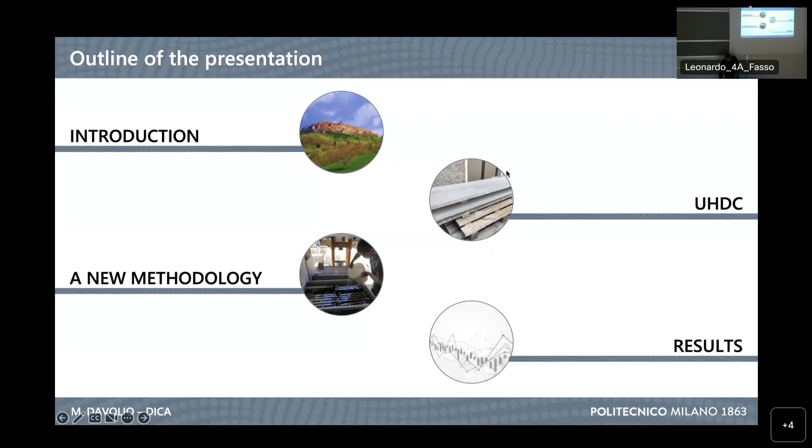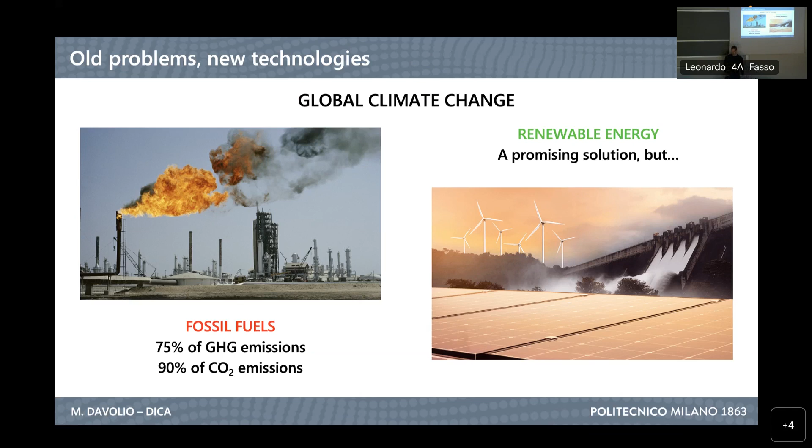As an introduction, I started from one of the most trending topics nowadays, which is global climate change, affecting global warming. One of the main issues related to this is fossil fuels, which highly contribute to the emission of CO2 into the atmosphere. One of the solutions we are developing more and more is the introduction of renewable energies, which are very promising from an energetical point of view. We know they have some drawbacks, but in general this is the direction we are heading.

There is a problem associated with renewable energy production: many plants have to face very harsh conditions during their service life. As engineers we know they are designed for a very long service life, and since they are very particular structures, they have high mechanical demand and also durability requirements, especially the ones exposed in harsh environments such as chlorides, sulfates, or others. We have some examples here, and for these applications we already know that ordinary reinforced concrete is not suitable due to its poor durability properties.

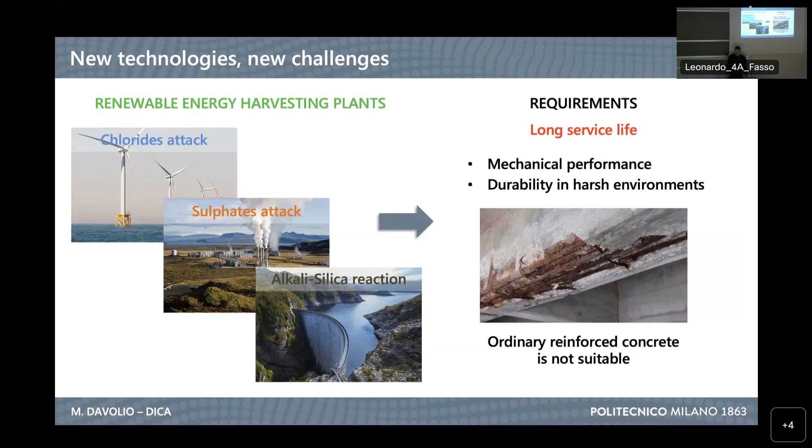For this reason, in the framework of a European project, we tried to develop a new material which counterbalances the lacks of performance related to ordinary concrete. The purpose of applying this material is to develop different designs for strategic structures in different conditions, such as onshore and offshore, which have different exposure and environmental conditions they have to face throughout their service life.

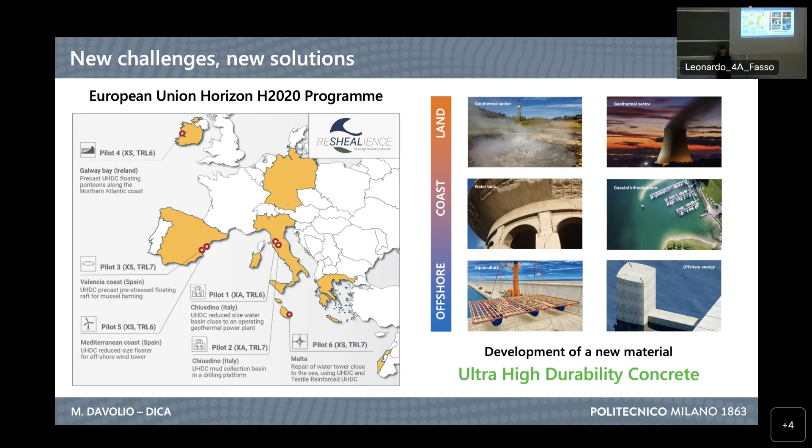As I introduced the concept of this new material, ultra-high durability concrete, I will now briefly describe its properties. Starting from the mix design, the things I want to point out are the significantly low water-to-binder ratio, which guarantees a high compressive strength, and also the delayed hydration, which characterizes this material due to the unhydrated cement particles inside the matrix after casting.

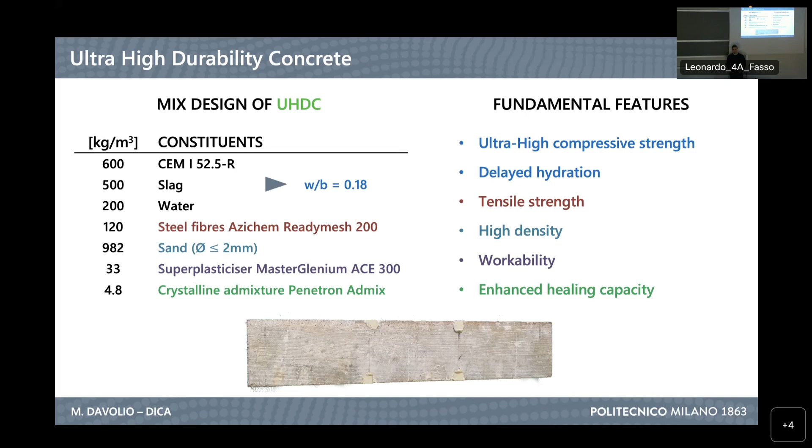Then we have 1.5% by volume of steel fibers, which can give this material a remarkable tensile strength. So we will see what are the results of this kind of mix design. Then we have some other components, and the one I want to highlight is this crystalline admixture, which was specifically developed to enhance the healing capacity of the material.

As I mentioned, one of the main features of UHDC is this mechanical performance, both in terms of compressive and tensile strength, which allows us to reshape our concept for structural design, reducing the sections of the elements, and in some cases, reducing or removing the reinforcement parts.

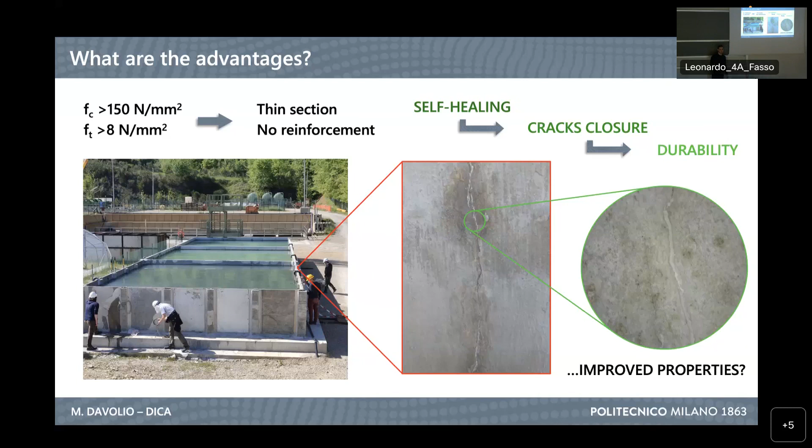And from the durability point of view, you can see here a real-life application, and the self-healing capacity of the material closes the cracks that happen in concrete, as we know, and thus fosters the durability of the structure itself, limiting the penetration of aggressive agents inside the matrix, and thus the corrosion of the reinforcement.

But all these features need to be implemented in our design process. And to do this, as we know, we need a constitutive behavior of the material. Specifically for UHDC, one of the most important things is its behavior over time, because as we mentioned, we developed this for durability.

Durability is a property we need to address over time. Currently, the most diffused standards use this prescriptive approach, where durability is addressed by some requirements we need to fulfill to complete our durability design. But for this material, this type of approach is not suitable because it does not have static, constant properties, but a kind of evolving response over time.

So the reason why we needed to develop this methodology and to carry on this work was to try to understand how these properties develop over time in terms of constitutive behavior and durability response.

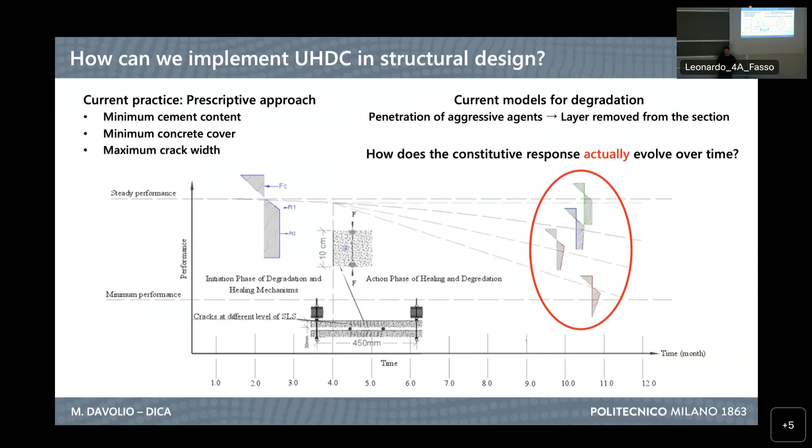So, as I said, we developed this methodology. Here I reported the main characteristics of the methodology we proposed, which was meant to represent as detailed as possible the conditions a structure has to face throughout its service life, namely a long-term exposure, which can be facing different types of environments.

I already mentioned chlorides and sulfates. These are two very common applications for offshore structures, for example, or geothermal plants, which you will see later. Then here we have flexural loading, and in general, a structure has to face any type of mechanical loading. We study the flexural loading, which has to be applied throughout all the investigated time.

And then these two parameters affecting the performance of the material are counterbalanced by the self-healing, which should be able to counteract the degradation of the material and provide constant or enhanced performance over time. Other characteristics of the methodology we will find out throughout its description are the repeatability, adaptability, and it involves many different parameters so that we can address different properties of the material.

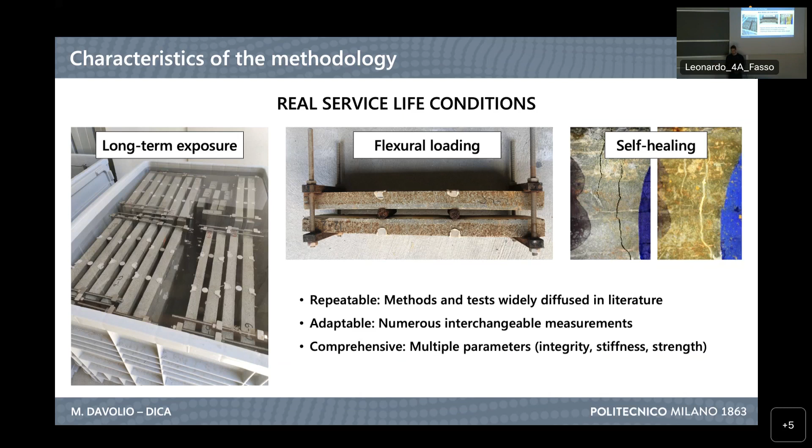And this methodology was not only proposed, but also developed on a case study where we addressed 3 different batches of UHDC, where the reference one had only the crystalline admixture in addition to the mixed design I already described for the autogenous healing.

While the other 2 batches, having also the crystalline admixture, also had, in one case, alumina nanofibers, and in the other case, cellulose nanocrystals. We will later find out the contribution of these nanocomponents to the performance of the material. On the other side, we investigated 3 different exposures.

The first one is tap water used just as a reference, but what we know is that our structure, for example in this case we have a geothermal plant, is exposed to sulfates, and this is a raft for mussel farming, exposed to chlorides inside seawater. So we studied these 2 exposures.

I want to mention that for geothermal water, we shipped the real water from a geothermal plant to the laboratory to have it for our exposure.

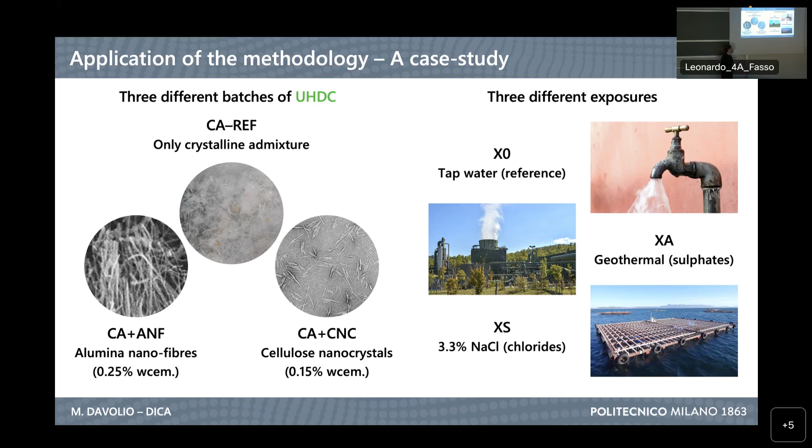And this is the layout of the methodology. I know it's a quite full slide, but we can separate it. On the left side, we see all the specimens we tested. For each material, we had 72 thin beams. We will see a picture of them later.

The idea was to expose all of them in the 3 different exposures and test them at different times. For the first 3 months, the testing was carried on with 9 couples globally, and then we took wider time spans of 3 months up to 6, 9, and 12 months, with a higher amount of specimens.

So this is what we tested, and what we did is summarize these experimental steps, which started on the site of the geothermal plant you saw in some pictures, with the casting of the slabs, which was also helpful to actually see the real condition of casting we face for precast structures on site.

For these slabs, a magnetic survey was performed, and then they were cut into the thin beams we used for our laboratory testing, which started from this first stage, where the specimens are uncracked, as they were produced, and we did two different non-destructive tests that we then repeated afterwards, as you can see from the picture, at stage 2 and 3.

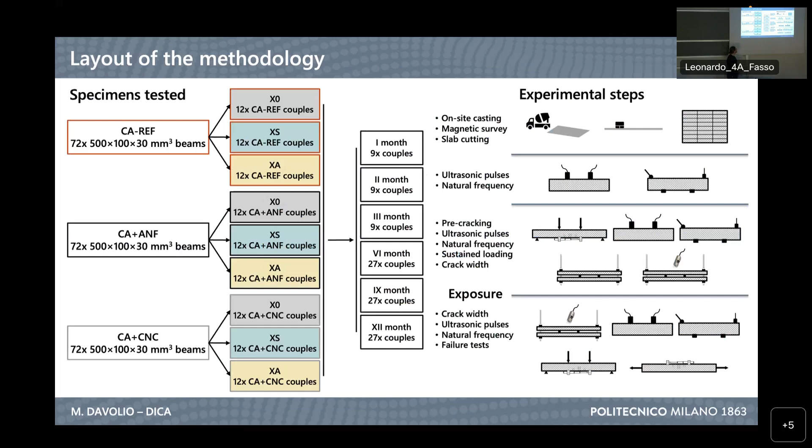So now we will go through the steps I briefly described. This is the magnetic survey, and the purpose of doing this was to try to determine the distribution of the fiber, because of course when we cast fiber reinforced concrete, we don't know the actual result of the casting, especially when we discuss on-site casting, which has some logistical issues.

For this purpose, we used this magnetic probe, which is able to measure the inductance of the material on a thin layer, which was perfectly suitable for our case, since we had nominally 30mm slabs.

From this, we could draw these contour maps. You can see an example here, to see if there was any significant variation of the fiber content inside any slab. What we observed is that the distribution of the fibers is quite constant on the surface. I want to point out, I'm talking about the surface and not about the section. We will see about this later.

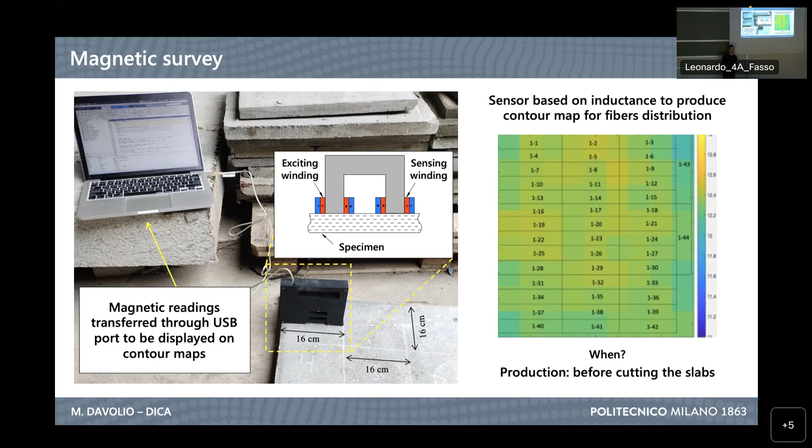For this reason, we can consider all the beams we cut from the slabs as nominally identical in terms of reinforcement, which is very important to address their mechanical performance.

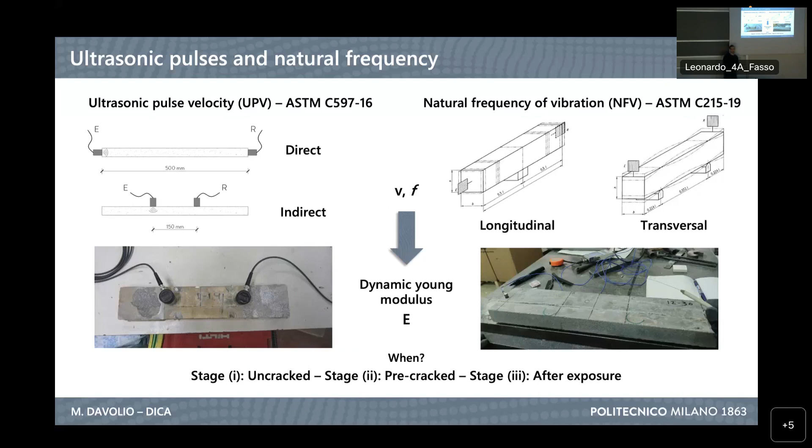These are the two non-destructive tests that we repeated 3 times: ultrasonic pulse velocity and the natural frequency of vibration. I will not spend much time describing these tests. We did each of them with two different layouts. The purpose is to obtain a dynamic elastic modulus, which represents the condition of the specimen at the investigated time. We could also relate each measurement with the previous ones to see how it evolved.

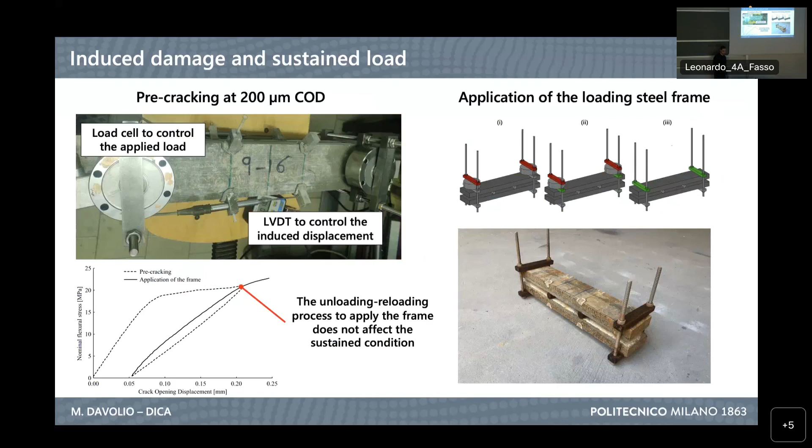So we verified that reloading it at a specific targeted crack width—better, at a specific load, which was the same we achieved during pre-cracking—obtained the same crack width we wanted to have. For this, we calibrated the system and we observed it was as we expected. So the condition we see here is the same as pre-cracking.

Then we measured the crack width of the specimen by means of a digital microscope. We did both a detailed scanning of just 2 cracks from each specimen, as you can see from the scheme, and in some cases we counted the number of cracks because we expect a multiple cracking regime from the UHPC.

This is the processing we did for the cracks. We could recompose the profile of the crack with the pictures we took from the microscope, and from that we binarized the crack to obtain the area. We tried 2 different methods.

The first method was manual, which was very time-consuming, and for this we moved to a more automatic method, which was this DeepCrack code, which allowed us to just give the raw image to the software and obtain the profile of the picture of the crack.

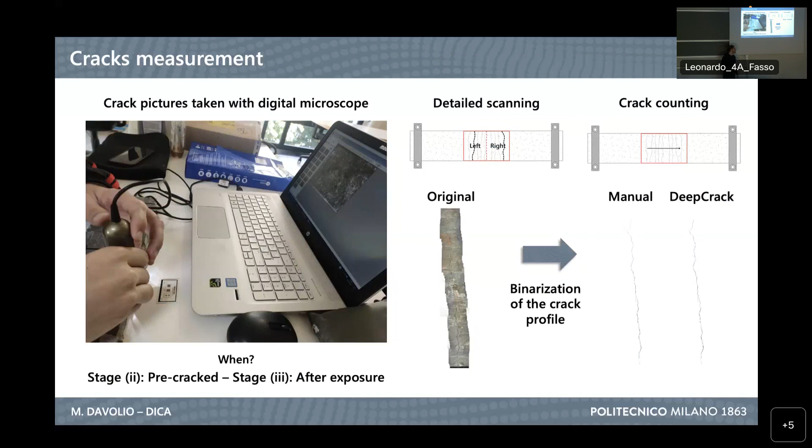We also calibrated this method, observing how much was the difference between the manual processing and the automatic processing. And the difference was below 5%, so we accepted the automatic one as reliable.

And the ones I already described are the non-destructive measurements. Then we move to the destructive parts. As I said, the specimens were pre-cracked and then, after exposure, were tested under failure.

For the ones that were tested under 4-point bending, we have this curve, which is the pre-cracking, and the subsequent curve, which is the failure.

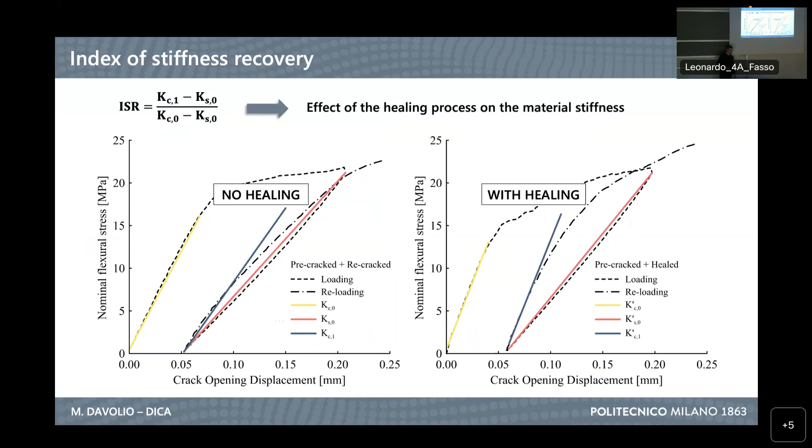And from this, we could calculate the index of stiffness recovery, which is defined here. As you can see, this is one case without healing, and the stiffness has no significant variation between the initial loading and the second loading, while when the initial loading is at the beginning and then we have healing, we have a slight or remarkable increase of the stiffness.

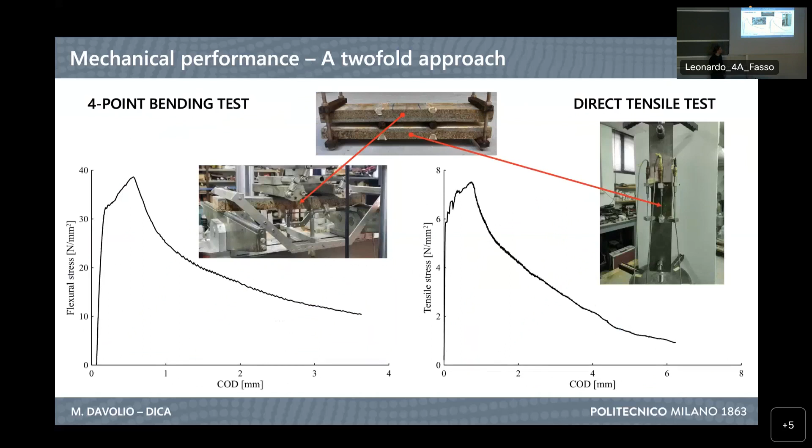For the failure test, we have a twofold approach. As I already mentioned, one of the 2 specimens from the couple was tested under 4-point bending, and the other one under direct tensile test.

The last step of the methodology was to develop a method to obtain a constitutive behavior, because this is what I mentioned as our goal for the work. The problem is that for flexural tests, we only have a structural response for the specimen.

And for this reason, we took a simplified inverse analysis method from literature, and we adapted it to our case with the purpose of obtaining from our 4-point bending test a constitutive response.

We derived these numerical correlations between the test and the constitutive law. And as you can see, we also controlled the calibration of the method, which was quite satisfying, and for this reason, we applied it.

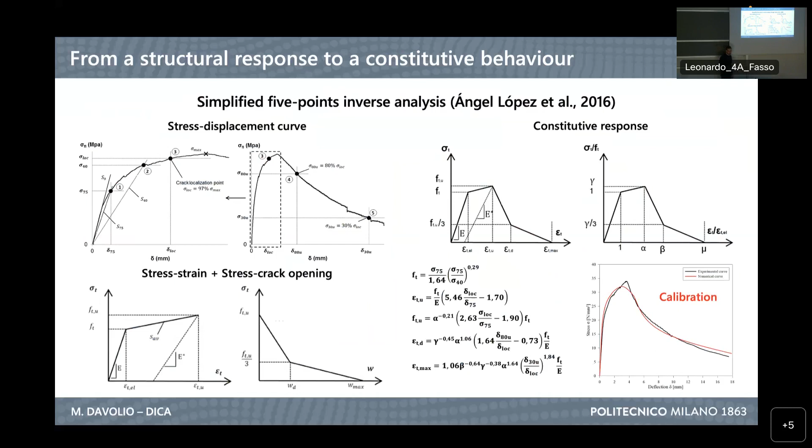Then I will briefly discuss the results of our methodology.

Starting from the self-healing capacity of our UHPC, which, as you can see, developed a multiple cracking regime with many cracks of a very small size, small width, and this fostered, of course, the self-healing capacity of the material, which is able to seal these small cracks, as you can see from the picture. Most of them are sealed.

And this is what we experienced here, when after 9 and 12 months, all the cracks were completely closed. And also, after very short periods, we already are between 85 and 95% of crack sealing.

And also, the cracks we formed at pre-cracking and that were sealed, they remained closed even during the failure test, which localized the failure on new cracks, meaning that the products developed during the sealing process were effective to bridge and to close the cracks, also resisting from a mechanical point of view.

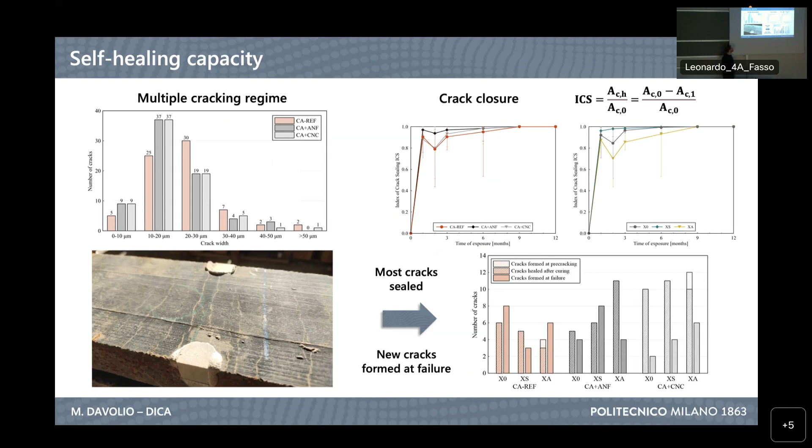The stiffness was addressed both from the dynamic modulus, or recovery of the dynamic modulus compared to the initial condition and the damage we applied to the specimen, and this confirmed what we observed from the crack sealing.

As you can see, in most cases, after 1 month, we are already close to 100% of recovery, and the performance stays still until 12 months, where we observed some slight reduction of the values.

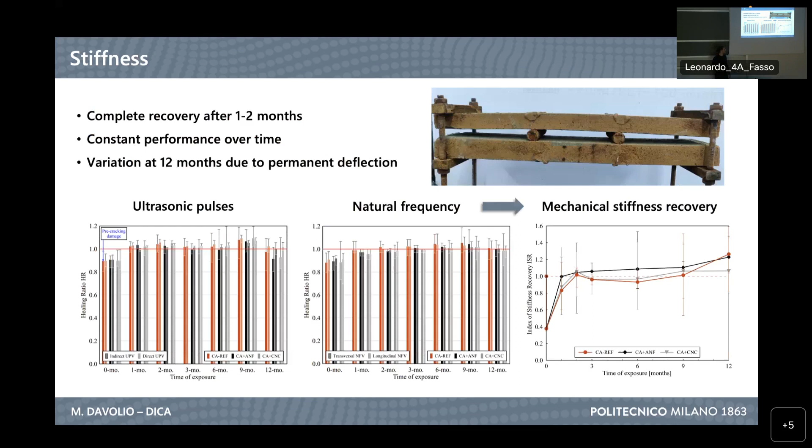And also, with the index of stiffness recovery, which is then a mechanical measure, we observed the recovery up to from 80 to 100%, even after 1 month. And it progressed constantly at 100% for all the periods.

From a mechanical point of view, we see some scattering of the results, which is even more significant than the evolution or any possible trend over time. This means that the specimens are not really affected by the condition they are facing, and on the contrary, they are effectively healing and keeping their constant performance over time. So this is another confirmation of what we were trying to observe.

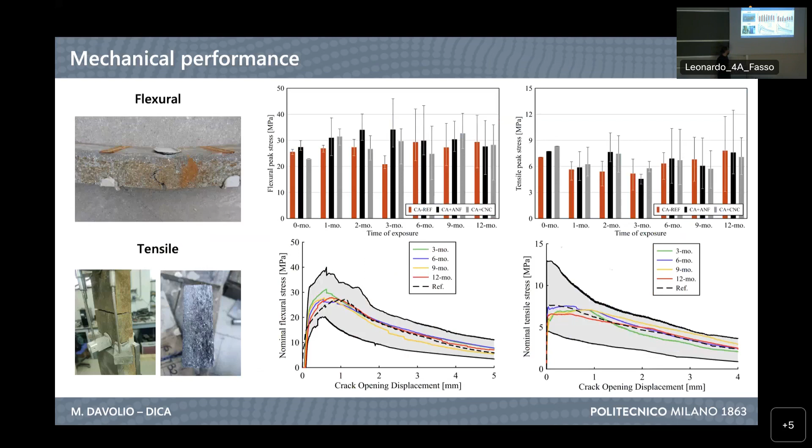As you can see from the average curves, from the flexural test and from the tensile test, they are pretty similar, and they are all close to each other and inside this envelope of the tests. And these are some pictures of the failure we observed. We will further discuss the tensile failure later.

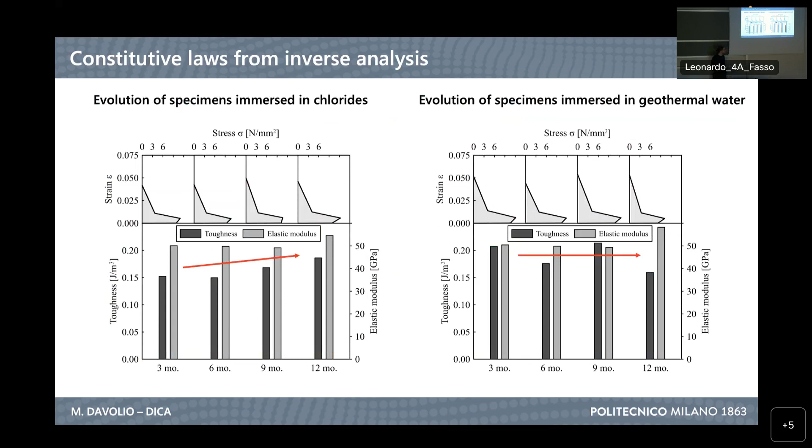These are the results from the last step I mentioned. I am just presenting two cases, the specimens immersed in chlorides and in geothermal water, because what we observed from crack sealing is that for the chlorides we had this phenomenon of remarkable sealing of the cracks at very short times, confirmed by the inverse analysis with this increase of the toughness of the material, while geothermal water performed almost constant over time with some scattering from the first period to the last one. And this is where we experience some reduction of the response of the material.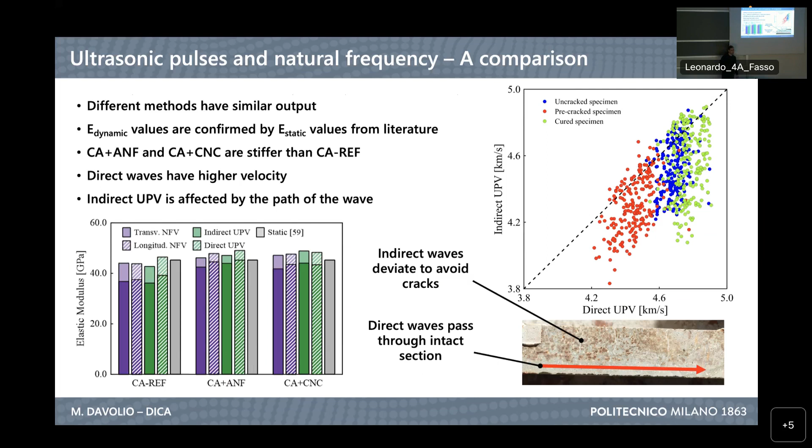We have some differences, especially between the two ultrasonic pulse methods, due to the path the waves have to follow inside the specimen. Because while direct waves can pass through the undamaged section, the indirect waves are more affected by the presence of cracks or sealing on the top layer, which is the tensile phase of the section. This is why we have faster traveling time for the direct waves compared to the indirect ones.

For the two methods proposed to determine the constitutive law, the constitutive response of the material, there is a clear increase of the properties in the case of inverse analysis compared to the direct tensile test. But what we discussed about this was that the tensile test had two different problems, one of which is the distribution of the cracks.

You can see from this picture of the section that fibers are mainly distributed on the bottom of the slab, meaning that if we test it under flexural loadings, it is very effective in acting as tensile reinforcement. But when all the section is under tensile stresses, we experience failure from the side where we had poor content of fibers.

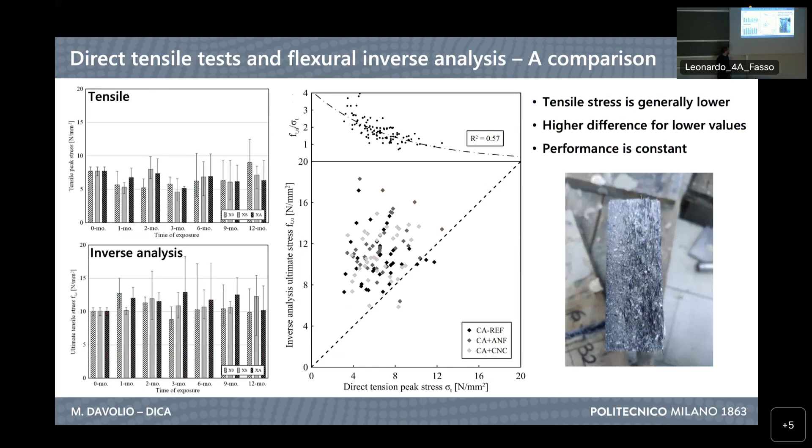The other issue related to the tensile test is the permanent deflection we had on the specimen, specifically after 9 or 12 months, which then causes failure not under pure tensile, but under flexural and tensile stress. For this reason, we had lower values of stress.

Another possible suggestion for future works is to address longer periods of exposure, even though we know a PhD is just 3 years, so it might be challenging to follow these longer periods, but it might be interesting to see if the properties start degrading after such a long time.

For our material and for the exposures we observed, the self-healing capacity of the material was confirmed, and specifically the nano-additives fostered the healing and mechanical performance of the material. While for the exposures, we observed some positive contribution from chlorides to seal the cracks due to the binding of chlorides inside the matrix, while for geothermal water, the sealing process was hindered in some cases.